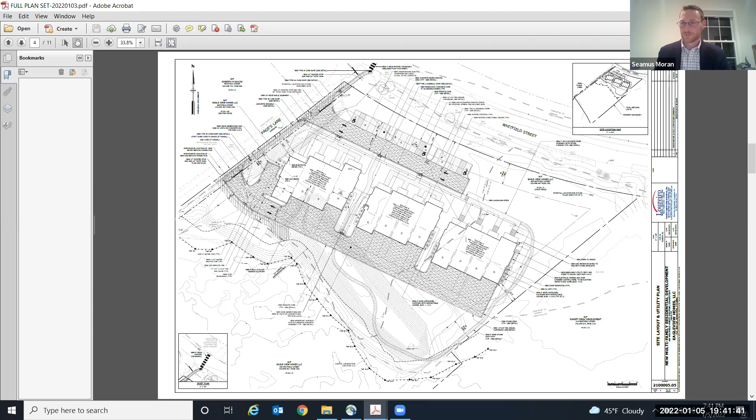So there were 7 minor items. The first item is the front setback. She asked us to change it to 30 feet, so we did that. We had the underlying setback distance on there for the Guilford Town Center District, 30 feet.

So we changed that. The underground electric was previously shown coming on the east side. She asked us to relocate that to the west side, outside the LiMWA line. So all we did was relocate it from a pole on the east side of Whitfield in front of the property to the pole on the west side. That was another minor change.

That was item 2. We added some call outs to the utility platforms. One on this utility platform shows what the elevation of that platform is, and we modified the call out for these 2 platforms, which you can't see at this scale, but I wanted to point out they are minor and are on the revised plans.

One item is outlet number 2, this discharge pipe, which was shown just beyond the coastal jurisdiction line before. We rotated that slightly. It has to daylight at elevation 5 to provide adequate pitch coming out of this manhole, so we're still at elevation 5, but the coastal jurisdiction line is 4. By rotating it and getting it just outside the coastal jurisdiction line, we satisfied that comment, so the location of this discharge pipe is slightly different than the last plans.

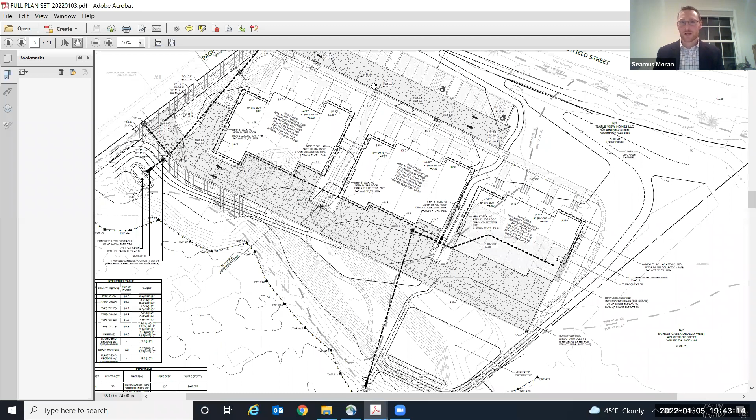The sidewalk along Pages Lane — first, it was shown as pavers before, where now under the site layout plan it's just called out as a concrete walkway, consistent with town standards. We also realigned the roadway slightly, where it was flared out a bit more previously on the east side of Pages, where it connects to Whitfield. We essentially extended the projection of Pages so we can terminate the walkway and the accessible ramp to show the crosswalk.

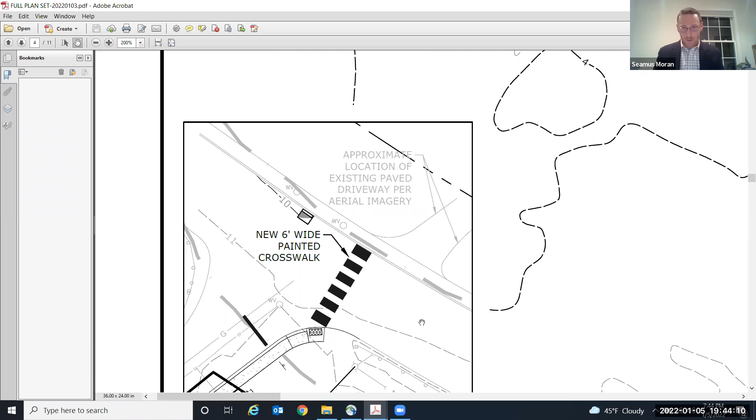And we added an inset, because it's just off the page, in the bottom left corner, which shows how that crosswalk is just west of the driveway to the east. So now this is the end of the walk. As a result of realigning the road, the crosswalk ends just west of the access drive on the other side of Whitfield.

A couple last items: we added a stop sign and stop bar on Pages Lane, up here, as you can see, before Whitfield.

And that is it for the plan revisions. The only other item is we provided the FEMA letter. We were in the appeal period before for the LOMR, and it was supposed to be effective on December 17th as long as there were no appeals. There were no appeals. We received that letter from FEMA, and now the LOMR that we discussed previously is officially effective December 17th, so that is active now. Those are the minor plan changes.

If there are any questions, I can take them, or I'd rather just pass to Russ and we can go over the minor changes that Russ has, if that's okay. Fine with me. Russ, you good? Yep, I am. So I will share here.

Okay, are you seeing my site plan? Yep, fantastic. So at the request of Janice, she mentioned that she felt the path we had leading out to the eastern side of the property into the easement might create a dangerous condition with people wanting to cross Whitfield. So we've removed that path, looped it back through the property for internal access, and consolidated the only crossing at the crosswalk at her request.

And also, regarding Jamie's comments about the lookout, we are very constrained as to where we can place this outside of the FEMA flood zone. We want to be outside of the VE zone, outside of the LIMWA zone, and outside of the 25-foot setback required for the critical coastal resource.

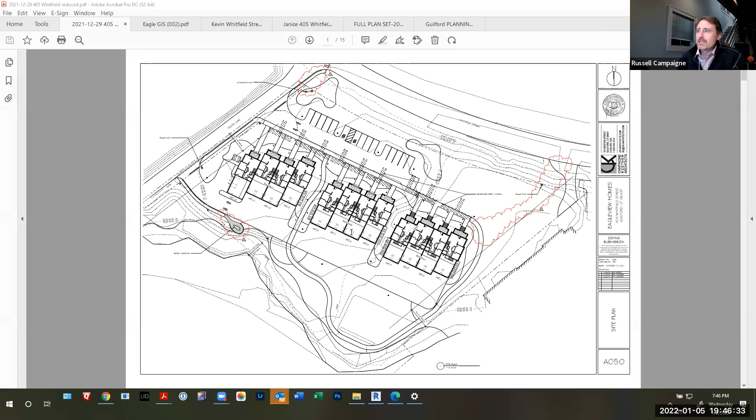The lighting, as you had seen, we gave her additional information about the lighting selections we've made, and in her letter she felt as though we had satisfied the concerns she had for the Dark Skies initiative. I think we also submitted additional landscape information. You can see the lookout sits a little more organically shaped and tucked into the landscape, and our landscape plan updated that area. We took the path and bollard lights off, so in general I think we have a very positive response from her.

Two items I would like to bring up during our presentation that I know will likely have further discussion after the letters are read in are the trash and recycling issues that Janice has brought up.

We are proposing to put rolling bins into each of the garages for each of the 12 units so they can manage their own trash. They'll pull them out to a location the garbage truck can access and pick up, treating it like a residential single-family home setup, as opposed to a consolidated dumpster location where all the owners would have to carry their trash to a centralized spot, which risks wind blowing debris and animals.

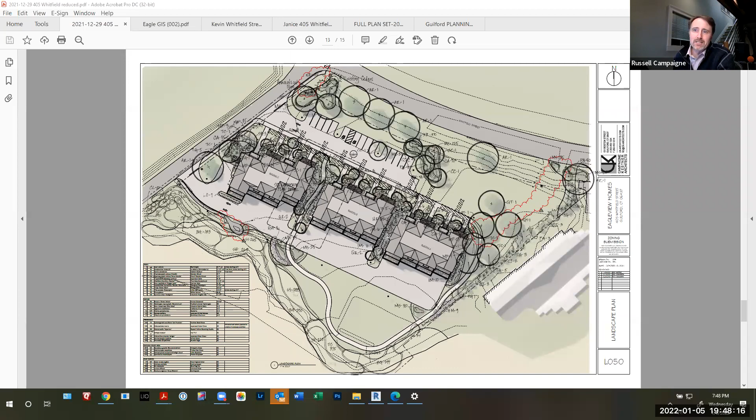I didn't really understand her concerns with storing rolling trash bins within each of the garages. We can put a little fenced-in area on the sides of the buildings if there's concern, but we'd much rather hide the trash storage. I think that's how most people handle their trash, keeping it in their garages and pulling it out once a week. I'm not sure how to react to her condition, but she felt we should have a consolidated trash area. I'll put that to you and just wanted to mention our feeling and decision-making on that.

And then the eagle will be another topic, as Bill brought up. The old nest is here, and the new nest is located about 300 feet to the south of the old nest location. That actually improved our situation a little as far as the buffer, because you can see the old nest sits in this location on town GIS. We're about 300 feet further south, and the 660-foot setback is actually outside of any work area.

That 660 feet comes from the federal Bald Eagle Management Guidelines, released in 2007 when the bald eagle was removed from the endangered species list — it's not even a threatened species now, totally removed from any listing. But those guidelines were put in place mainly around a couple of federal laws associated with it being the federal bird and having protections that way. So these guidelines summarize the state and federal requirements for eagle management.

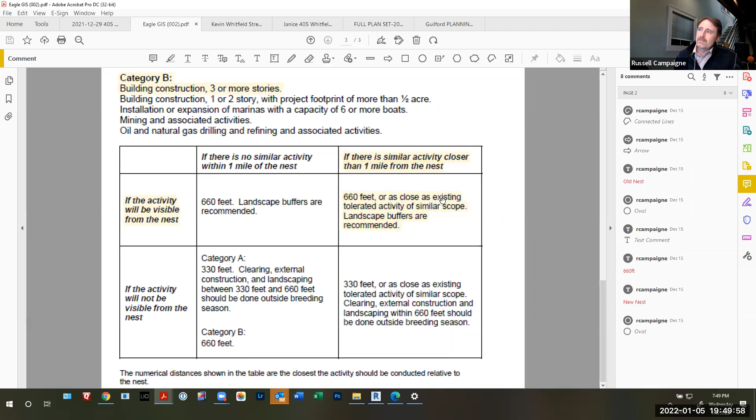The suggestion on their chart for category B construction, which is building construction of 3 or more stories, which we are, if the activity is visible from the nest, which it is, and if there are similar activities closer than 1 mile from the nest, which I think applies here given the construction at 66 High Street and other residential construction in the area, as well as the old activities on this site, it suggests a 660-foot buffer. So we feel we're actually adhering to those guidelines in the way we're presenting this.

We're calling the development of the property Eagle View. We obviously see this as a huge asset for the tenants — I think they'll see it as a real benefit to have views of the eagle, so we want to do everything we can to be sensitive to that. But we're also under pressure to continue the project and move through construction, so we'd love to have some discussion about what constraints we can put on this that might allow us to keep working as we aim to start as soon as possible in March, in the construction phase starting with site construction.

We're focusing our attention on not using any driven pile systems. So we're looking at a helical pile for our foundation system, or a spread footing, to minimize that sort of noise.

Our construction itself, I think, will be minimized and all outside of that 660-foot suggested buffer. At the very least, with Kevin's wording, we would love it to say—if we do feel we have to have a restriction between the period that he's asking—we'd love it to say exterior construction or site construction should not be performed during that period.

He currently just says all construction. Now, I would think we would be able to do interior construction on the site, because that would affect us next year finishing out units, and would be a real hardship on us to also shut down for 3 months when we're doing finish work on the interior of the building. But we'd love to have a discussion with you about a way to allow us a little bit more flexibility through the winter months and into the early spring to allow us to start as soon as we can.

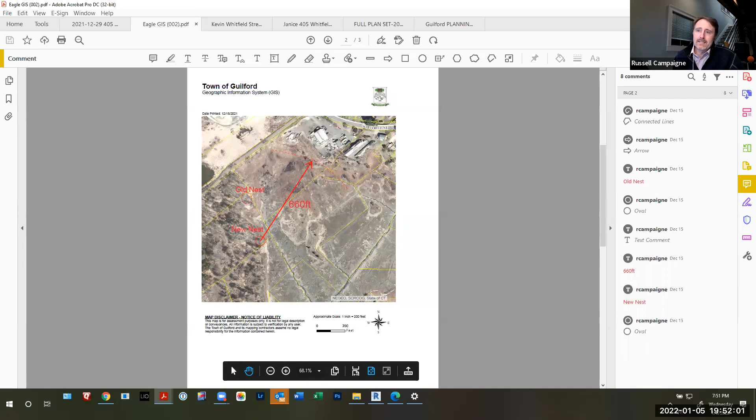So with that, I think we can close our portion of the hearing and then go into the letter read-ins, and then be able to react to any questions that come up. Thank you very much.

Frank, do you want to take the first letter from Janice Plasiak? Sure. Do you want to pop it up or you want me to pull it up? I think, hold on. I got it here. Hold on, ready?

Okay, take a deep breath, Frank. Got it. This is to the Planning and Zoning Commission from Janice Plasiak, the town engineer, dated December 15th, on 405 Whitfield Street. It's a special permit site plan and coastal site plan application. I reviewed the site development plan. Frank, you're reading the old memo. Sorry, that's my bad. Yeah, we don't want to read that one.

No, so hold on a second. She's got one dated today—yesterday, I think. I have it up, Phil, if you like. Okay, if you want to, I got one. Oh, you got it too, January? Yeah, I got it. I grabbed it.

405 Whitfield Street, the special permit site plan coastal site plan application, dated January 5th, 2022, from Janice Plasiak. I have reviewed the revised plans for the above referenced property submitted on January 4th, 2022, along with the attached letter I received from Loureiro existing survey. The submitted existing conditions property survey showed the temporary fill piles from the prior owner of the property, which were never permitted and are no longer in place. To clarify for the record, it appears that the 30-foot setback along Pages Lane is being taken from the incorrect property line. There's a separate parcel, Assessor's Map 28, Lot 8A, which is a 12-foot strip of land between that line and the site for development. The setbacks should be from the parcel line of the development parcel, or a separate lot that would need to be merged with the development parcel to use the line shown for the setback. The front setback line has been changed to 30 feet.

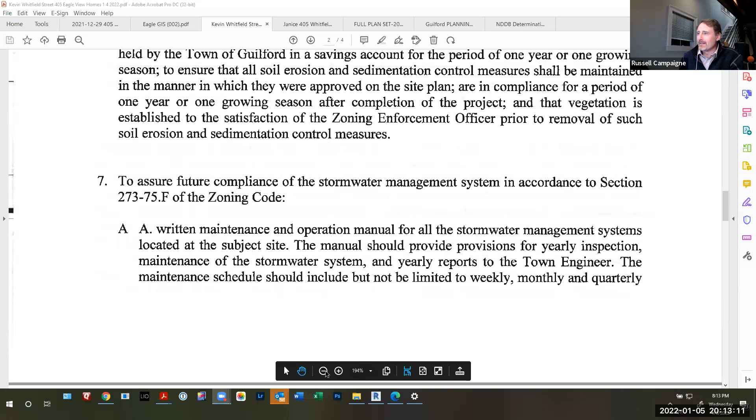I can post it here if you'd like. That would be the 3rd page, thank you, Russ. Is there a 3rd page? I think it's the second page that we're missing. There we go, that looks more like it. Oh wait a minute, there's quite a bit there. Oh, of course, yeah, there's a whole, there's 7 sections. So scroll up, Russ, if you could scroll up, that'd be great. Keep going. There you go. There.

Okay, thank you. I recommend the following conditions of approval in order to make sure that the coastal resources are protected. Number 1, prior to the issuance of a certificate of zoning compliance, the public access area be constructed and marked with approved public access signage, and the coastal access easement and maintenance agreement be conveyed to the town of Guilford.

Number 2, stormwater outlet number 2 is partially being installed close to the Connecticut Department of Energy and Environmental Protection jurisdiction, and any work within the area would require a permit from that agency. Stormwater outlet number 2 should be pulled back further inland so that no work falls inadvertently in the Connecticut DEEP jurisdiction, and this larger distance could provide additional treatment.

Number 3, a licensed engineer shall oversee the installation of the stormwater management system. The licensed engineer shall provide a final report to the zoning enforcement officer. Number 4, the town of Guilford zoning enforcement officer shall be notified to inspect the sedimentation and erosion control measures prior to any site work.

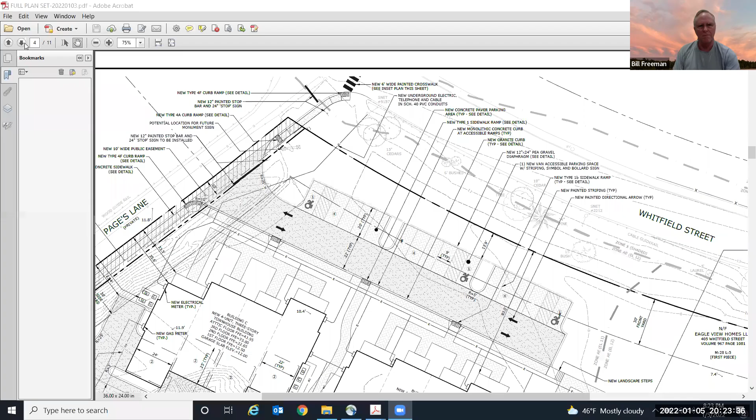Could you have Seamus bring up the water management system, just to refresh everybody on how it operates? Sure, Seamus, do you mind doing that? Of course, do you want me to share the screen? I can show you the mechanisms we've put in place. Yeah, I think there were 3 or 4. I remember 3 distinct areas, but maybe there was a 4th. That's correct. So can everybody see my screen?

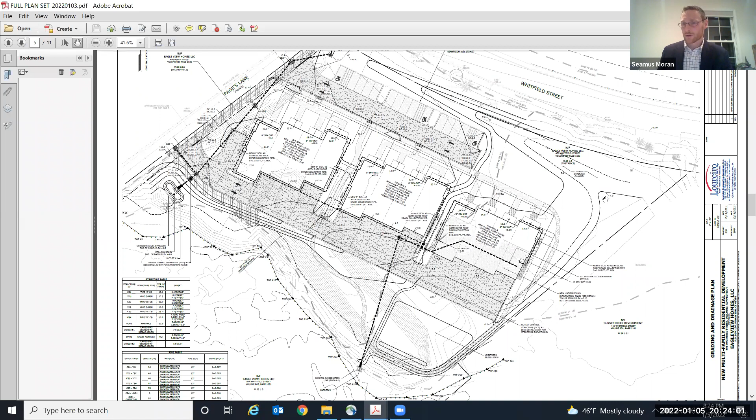On the front of the site is a grass drainage channel. All the runoff from the front of the site will enter this shallow swale and discharge around. It has about 300 feet of length to treat for water quality and water volume. It slows the runoff, discharging into a swale along the front, then down a shallow swale along the property line, between the two properties, through a little gully before discharging to the wetland. The whole length of the front is about 600 feet or so.

In the back of the property, all the runoff generated from the parking lot sheet flows down to a level spreader, as you pointed out, into a vegetated filter strip that's more than 50 feet. The 50 feet is what the water quality manual recommends; this is almost 100 feet, so it adds extra treatment. There's a berm at the bottom of that vegetated filter strip to allow pooling up to 1 foot of depth of water, to allow infiltration before it spills over the spillway.

And then there's another 30 feet or so before the wetland for that storm event beyond that. The third practice is a stone infiltration basin below building A, for the clean roof runoff. All the roof runoff from the 3 buildings, through this piping network, will discharge into this underground stone bed to infiltrate. For larger storms, we have an underdrain pipe that collects those events into an outlet control structure, discharging at this location to a level spreader.

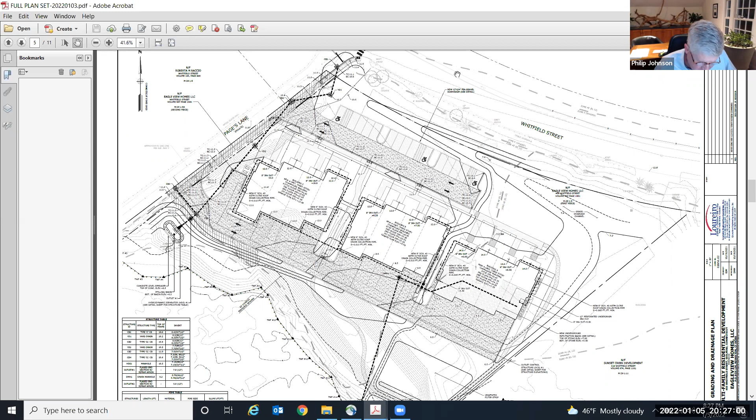Thank you. Hey Russ, I have a quick question. The letter references the recommendations from the Connecticut DEP from February 22nd. Perhaps Steve McGuire can answer this better than anyone else. Is the new nest, which is farther away, new this year?

Yes, this fall they re-nested and moved, is what I understand. They haven't laid their eggs yet, but they seem to be inhabiting that new nest location. Does that make sense, Stephen? You seem to be our local eagle expert.

Yeah, the original nest was established in 2014. I was really mystified when I saw the squirrel's nest getting a lot bigger and not seeing the eagles carrying nesting material as they do every year to this new location. So I called my buddy at Shepaug Dam, who is a true eagle expert, and his first question was, have you seen a lot of owl activity lately? And that's where that rumor started from, from Brian at Shepaug Dam, who is truly an expert.

So that's the most likely reason why they moved to the new site. Of course, my question to you is, is there any other reason why the eagles might move away from this nest? Do you have a renaming policy for eagle view if there are no eagles to view? But I've asked a number of experts, and the reason I'm not causing a fuss is, if they can put up with all the destruction and sometimes intentional malicious noise making in the neighborhood from road paving, I don't think you guys can come even close. Does that answer your question?

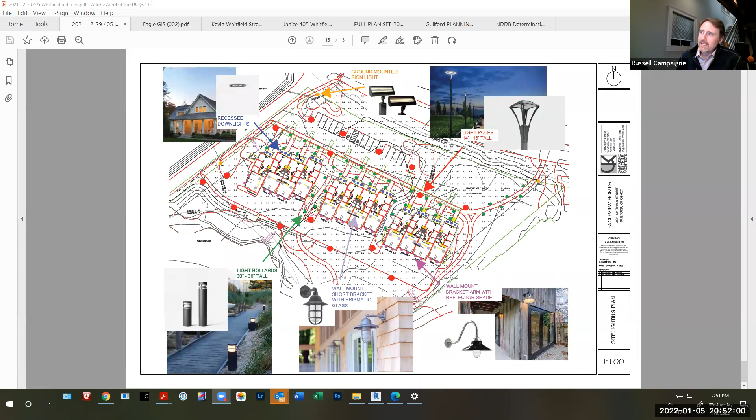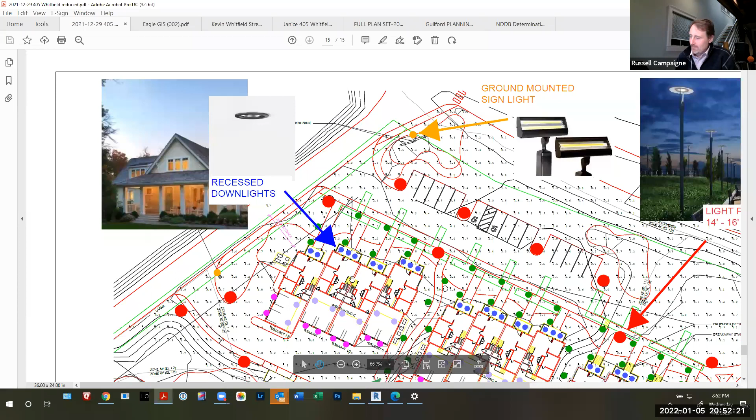The way this works is there's several types of lighting. There's low scale post lighting, that's the red dots, and low bollards only about 3 feet tall, that are green dots. If you zoom in, it actually shows the actual lumens on the surface. We have to show that we're not having any light pollution off of our site. It has to go to 0 before it hits anything off-site. So this is a very scientific review of how the lighting is being designed, meeting minimum standards for safety as well as not having any light pollution.

Janice did ask for additional information associated with some of the light cuts on the building, because traditionally they'd have a visible light bulb that might have glare, but we're using LEDs with the light hidden up in the can. So they look traditional, but they're recessed in a way that has a full cutoff, no more than a 90-degree cutoff, so no upward light. We're aiming to keep it all on the site. I think this overall lighting will be very much in keeping with the residential neighborhood and the light levels you're used to. There's no plans for spots or floods or anything that would harm the marsh.

As far as the headlights, we don't have hedges or other plantings with the front parking areas as it stands now. It's something we could look into, but Design Review and others wanted it casual, not formal with blockages. They wanted it more loose and landscape-like, like the rest of the street with residential. So we haven't set up definitive markings at the end of those. We don't think the guest parking will be used much. All daily use parking is behind the building, with 4 spots per unit, 2 inside, 2 outside. So it's really only when guests are coming that those front spots will be used. I think it will be very residential in scale and not a big concern.